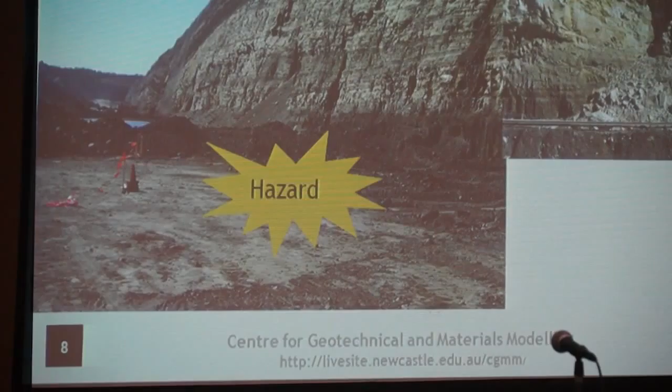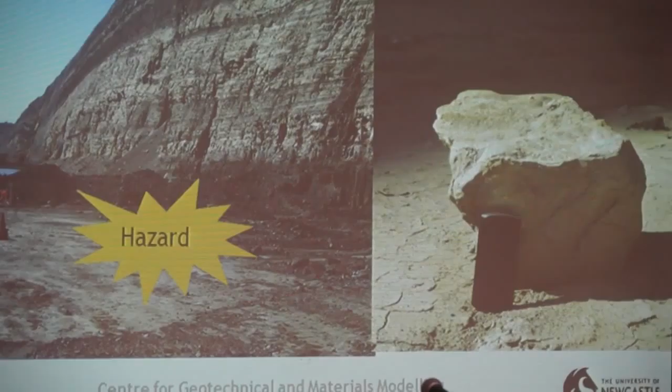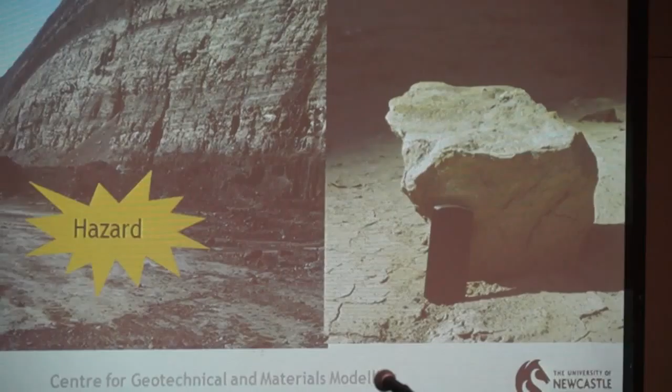So these images are some of the pictures that I took during my research, both in New South Wales and in Queensland mine sites. These are portals for underground entries and blocks around the portals. Rockfall hazard doesn't mean that we always think about a big block coming from the big mountains on top of you. Small blocks can kill. They can go extremely fast, and they come without any warning.

However, blocks can still detach, can still fall between the drapery and the rock surface, and can impact at the bottom with quite high energies.

I don't know why he's going straight away by himself, but okay.

Okay, I start again. It was not me, but

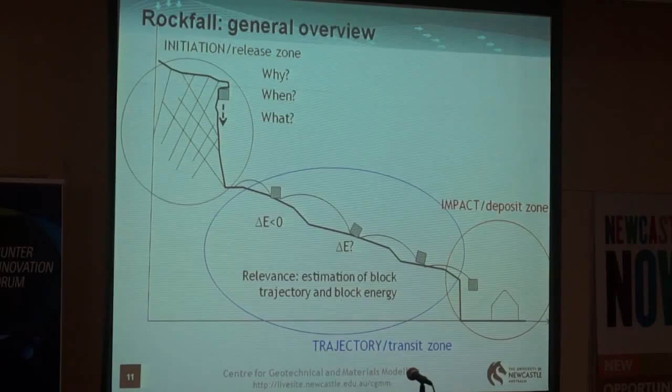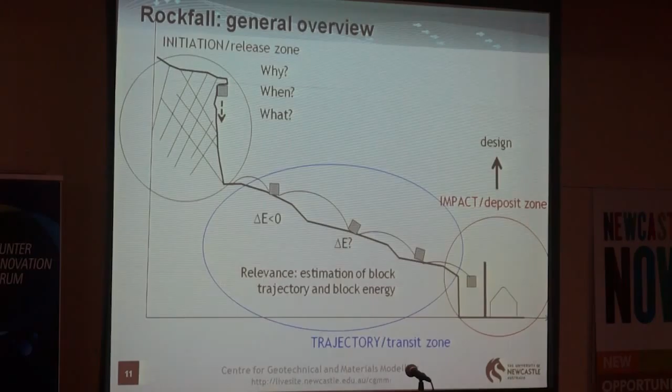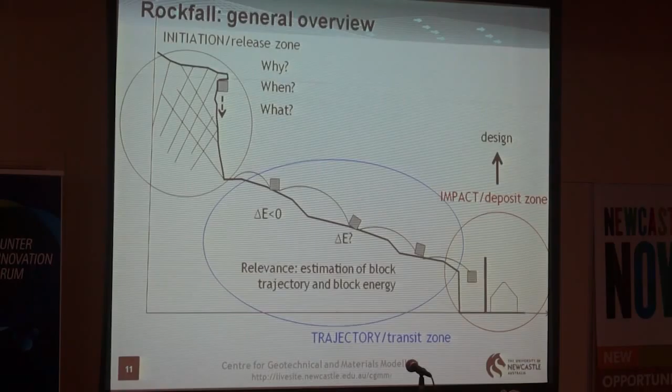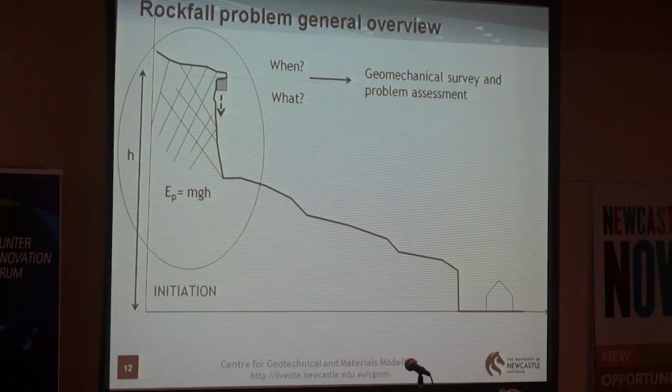Then the impact or deposit zone is important because it allows us to design the protective measures. Once we know where the block is going and how much energy we have to protect for, we have the information to design an appropriate mitigation measure. When and what can be assessed through the expertise of geomechanical survey, and the trajectory is usually analyzed through back analysis.

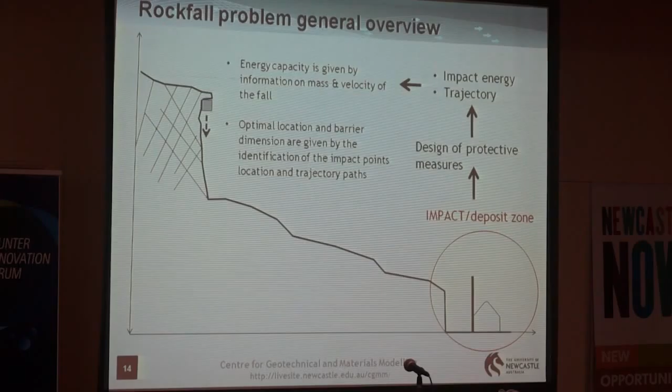Sorry, the presentation is going by itself.

I don't know why. So usually we do rockfall tests and predictive models.

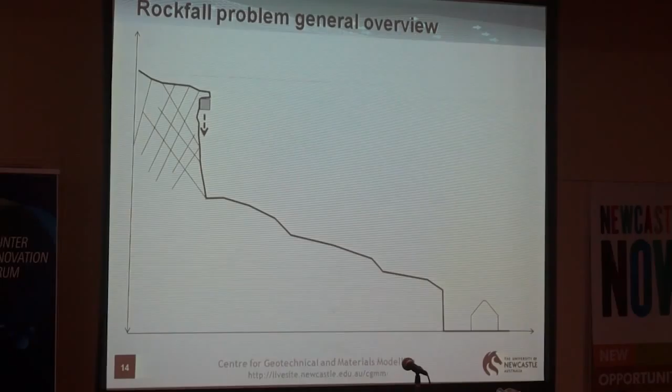I'm trying to speak fast to follow this. I don't know what's going on. Okay.

Very shortly, if the presentation gives me the time, we want to use two main steps. The first one is to identify the blocks, so the shape and the size of the blocks. And in the second step, we want to do modeling that allows us to predict what can happen.

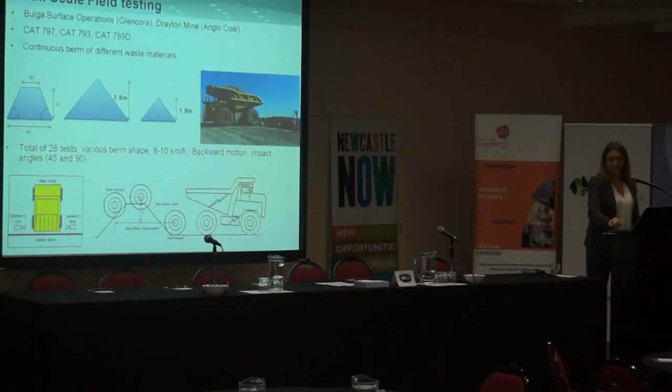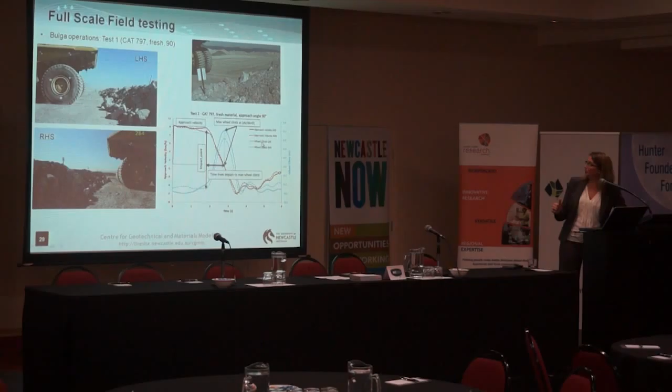Again, we used high-speed video cameras on both sides of the truck, and we measured the wheel climb, the wheel displacement, and all the motion during the impact. This is an example of the test with the 797 in one of the first berms. And these are the data that we were able to collect. So we measured the approach velocity, the maximal wheel climb, and

Sorry, it's going by itself, but that's okay.

The second series, this is a nice test. This is a multiple impact test. I have to tell you that I lost almost 10 years of my life at the third impact, just thinking about the amount of money I would have had to pay if the truck had been damaged. And you see, then there is the third one. Should come now. Yeah. That was the last one and the hardest one. I was sweating at this point. I didn't want to watch.

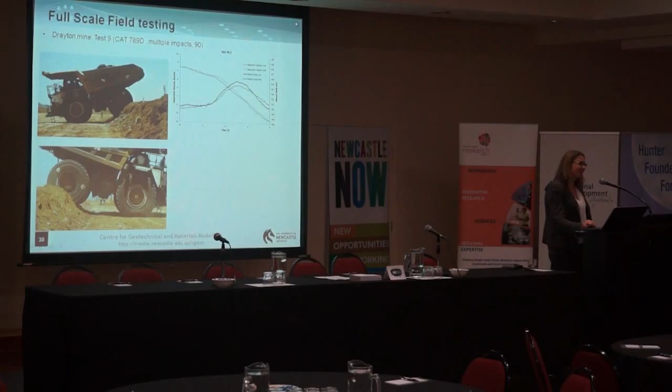But these tests were extremely useful for us because they allowed us to calibrate the model later on. First, with a very advanced 3D photogrammetry reconstruction, we rebuilt the berm. And with the photos of the berm before and after, we were able to measure the tire sinkage and the effect of the truck on the berm.

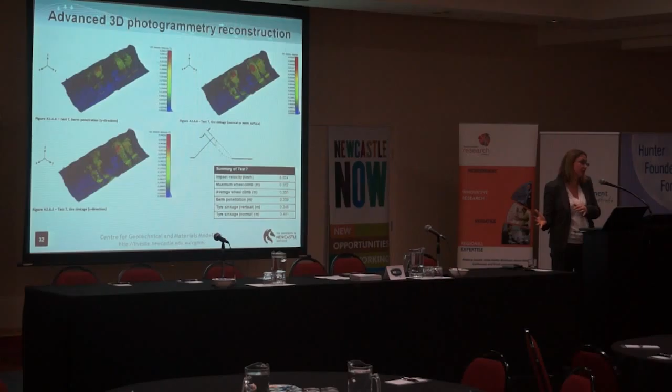I was not happy enough because for safety issues, I couldn't do the test with the forward motion. There was no way to convince the mine site to allow me to do that. So I said, okay, let's have a little bit of play, and my students were very happy to help me with that. And we rebuilt the conditions in the lab at the civil engineering department.

It's going on by itself, I don't know why, but okay, let's see. Okay.

In this case, it's the forward motion recorded in the lab. And in this case, I could increase the velocity. I could go even over 20 kilometers per hour in full-scale terms, and observe the punch-through of the truck or the rollover of the truck. This is an example of the main accident that you can observe and the risks.

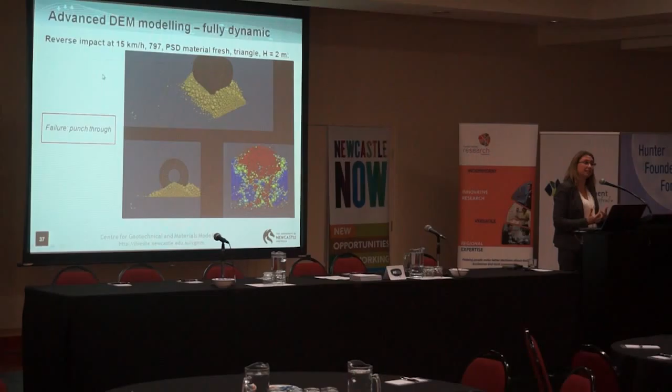And with all this data, I was able to calibrate my model and validate it. So you can see this is a simplification, but I can observe the punch-through of the berm. At this step, I have everything. I have the data from the full scale. I have the model that is correctly calibrated, and I can change the geometry. I can change the particle size distribution of the waste material, and I could produce guidelines for the mine sites that allow them to improve their design.

So finally, to conclude, I think what I presented is really how research and collaboration between the mining industry and researchers can produce something really applicable, not only to the Australian context where it was developed, but all around the world, because these methodologies are already used in other sites in Australia, but could also be applied in very difficult conditions, mine sites in other countries, improving the safety for the workers and for all the areas potentially affected by these hazards.